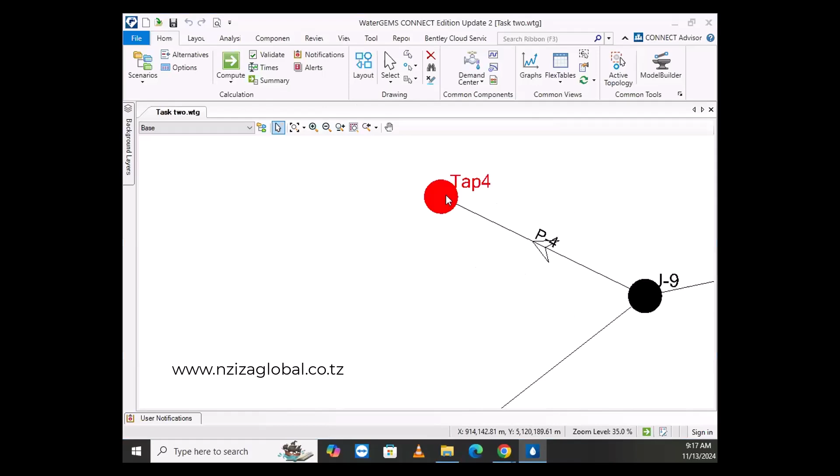So for example, what I was telling you is that on this node there was a demand. We passed here to add that demand in this corner. You can assign many demands on a node. This is the only one which should be here.

You can add others at the same node of different categories. The same node, different categories. You get this?

For example, let's imagine that at this level there is population. At this, along this way, there is a population, there is an industry, there is a hotel, there is many categories of populations.

Then you can come here, and instead of creating separate nodes for population, for industry, for hotels, you come here on this node, you just go on demand, you just put here population.

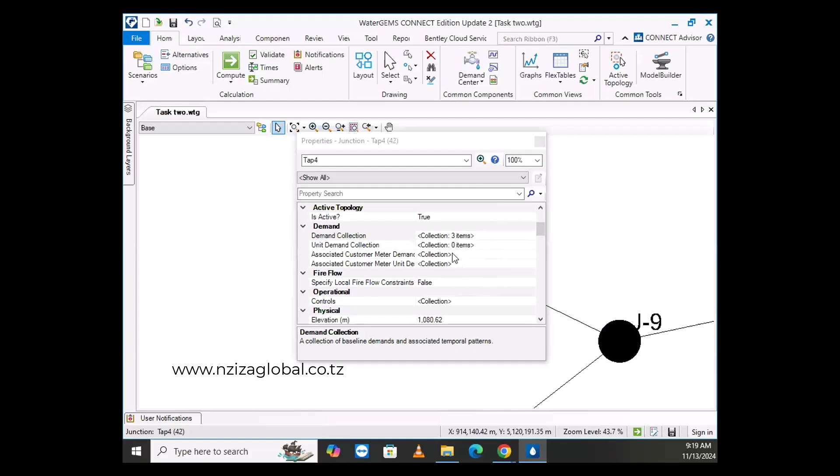So I was telling you now, if you find that this one you don't need anymore at this level, you just delete it here.

As you can even add the other one. It was easy. We are good.

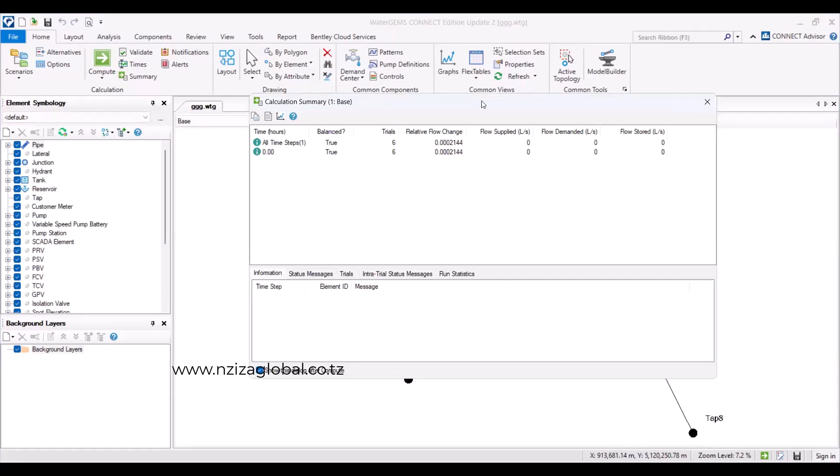Good, you are doing a great job there. Thank you. So then I want you to know, do you know how to add demand? Yes, we know, but not yet. But we can add. But the big problem for us is how to size the pump.

We didn't, you just add demand. You just add demand, okay. I will be right, or you can just wait. How I'm going to proceed, because you are still far. Okay, you can proceed during when you take a breakfast. I think we continue. You can proceed, okay. You just, when you find my mic mute, you proceed with adding demand, because I will mute many times.

You can just proceed adding demand. And then during the break I want you to finalize this one, and then I'll show you how to work with the pump. Yes, okay. It's okay, it seems that there is somewhere that there is a demand.

What about that pipe which is getting out directly from the tank? I see flow from the tank? Yes, that one. No, the other one. This one? Yes, there is a flow in that one.

Yes, there's no flow. This is pipe P3, no flow. Must be a flow there. Okay, you just add demand. And then continue following. You are doing a great job, you are doing a great job. Okay, this is good.

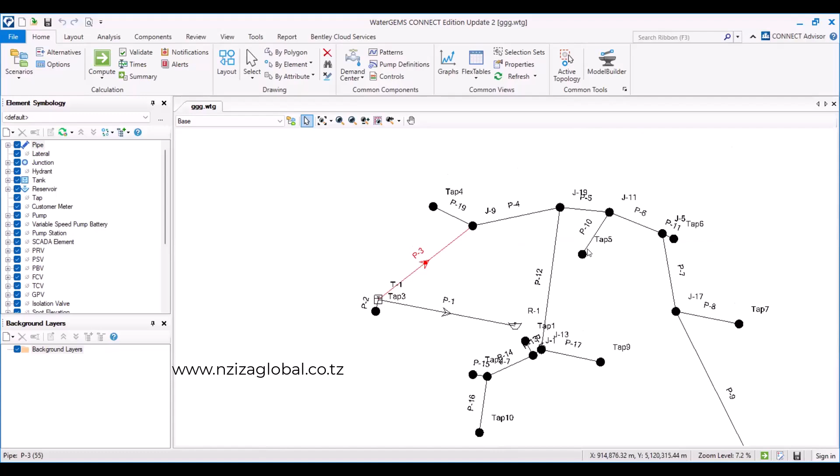So we are going to have our third day. We are going to start by seeing how to do scenarios and alternatives. We will create some scenarios and alternatives, start to compare those scenarios and alternatives, and we will see the advantages of advanced features in WaterGEMS: pressure zone management, fire flow analysis, and then we will get into that. I don't want today to go through GIS.

I just want you today, at least in this afternoon session, to have a big water supply system, to size it together, and then do optimization. Try to do optimization, try to design, to see all of that stuff today. We already had some design criteria, we already have some.

Economic consideration is that optimization you are doing, how to position your pump, how to do all of that stuff. So I want today in the evening session and tomorrow morning to have a big network that we will be working on. We all know how to put everything now.

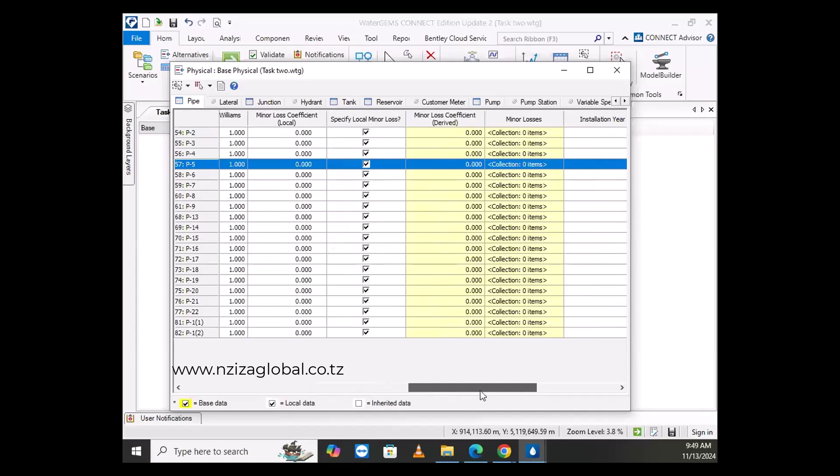But before that, let's see what is in the physical one. By double clicking on it, you will immediately see a kind of FlexTable, and most of the time it gives you all the properties that you had for your pumps, for your pipes, for physical - so you will see all our pipes here, the way we designed it.

So then, when you create a child alternative, it will give you another one - let's call it physical alternative one. By double clicking on it, you will again see the same things you already designed, but with a possibility to change some characteristics.

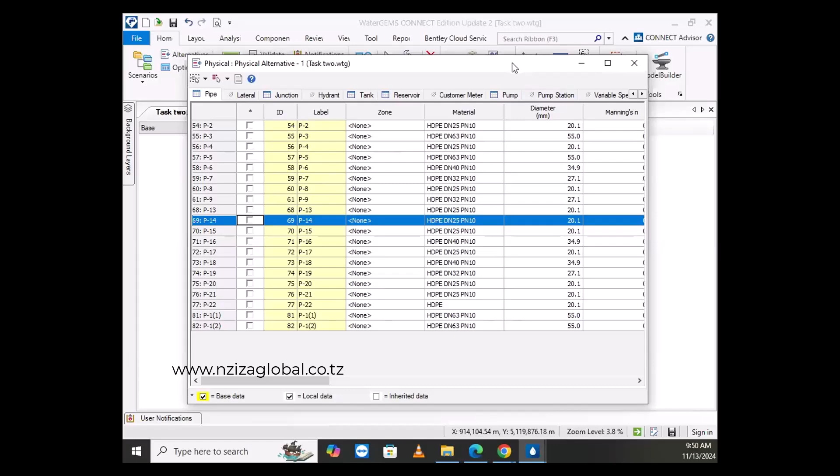For example, you may need to say, what if my transmission pipes, I make them 75? So you go to check on your transmission pipes. My transmission pipe was this one - P1, P12, this one, and this one too, I think.

So what if I make them 75? The internal diameter is which one? 65.6, yes? And this one also - I did, 65.6. And this one? The same, 65.6. So I'm saying that this one is changed.

So for this child scenario, I already changed those pipes. I cross this one. So you will see, for the base scenario, they are still the same. But for the child scenario, the child alternative...

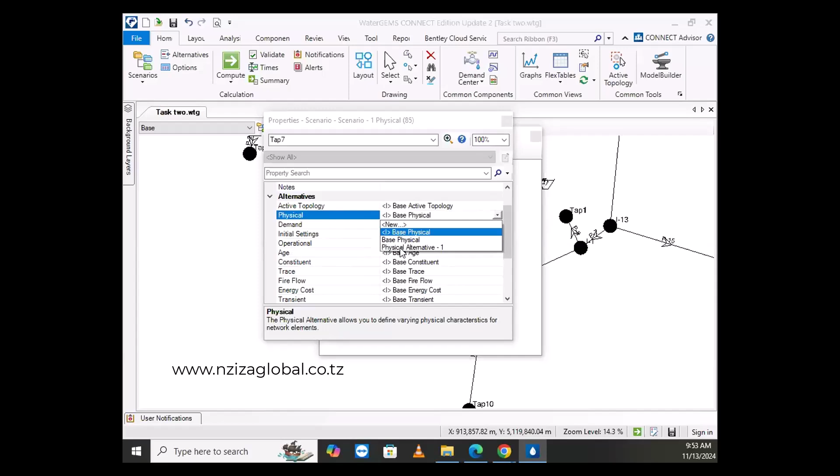All of those alternatives that we have in those icons, we may change them. So from here also we will have them, all of them here. So then we change the physical one. You go on it, you just get the physical alternative one, the one that you had. You remember that alternative. Then you click on it, so you can cross this.

Now you see these ticks can be here. When you do this, it means you are going to run this one. So then you can run the first. This is running the same as we used to run. You can check the pipe here.

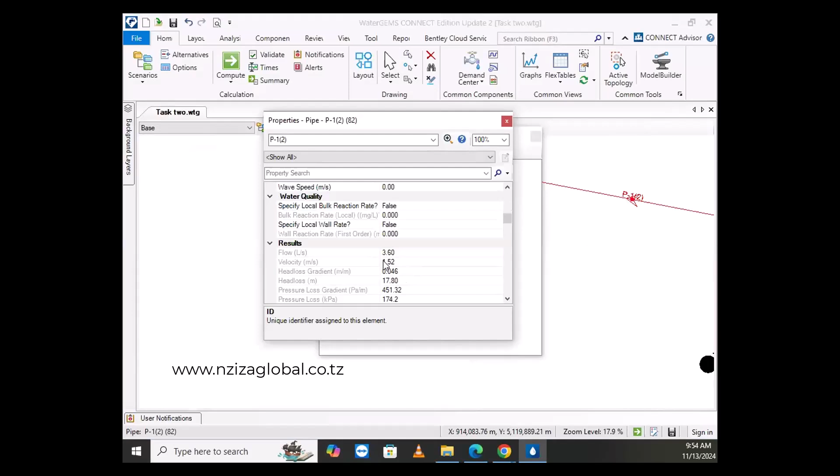The velocity is still that one, the diameter this one. The velocity is still 1.52. And then you can even pick this one and land this one. So you get the pipe have changed. The velocity as well has been changed. You get the difference. So from there you can create many scenarios, many options.

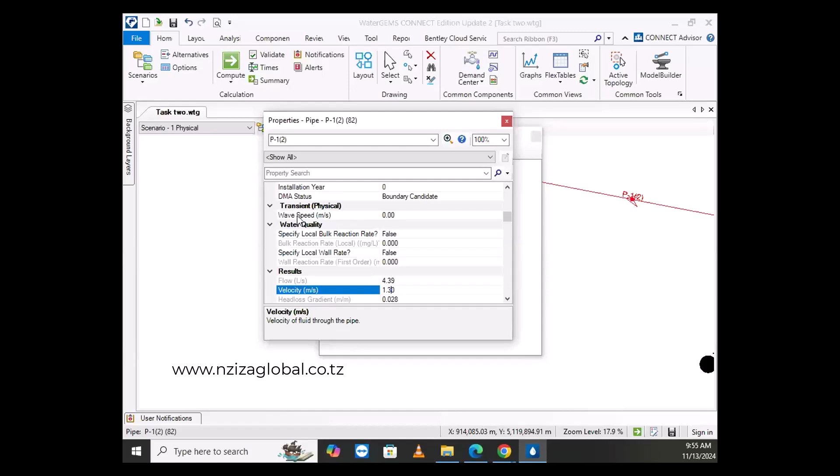What if I change this pipe to this one? What if I increase? There is also a way of adding many pipes. Add many pipes, you put them in some scenarios, in others you create them, run one by one, and see what the difference is. Is it okay?

Can you repeat how you go from base to scenario one physical? The way you reach that scenario one physical. Yeah, I know that you click there at scenario. You get this. So by clicking, let me, for example, delete this one. So by clicking on scenario, immediately I got this one. Base. This is the base one.

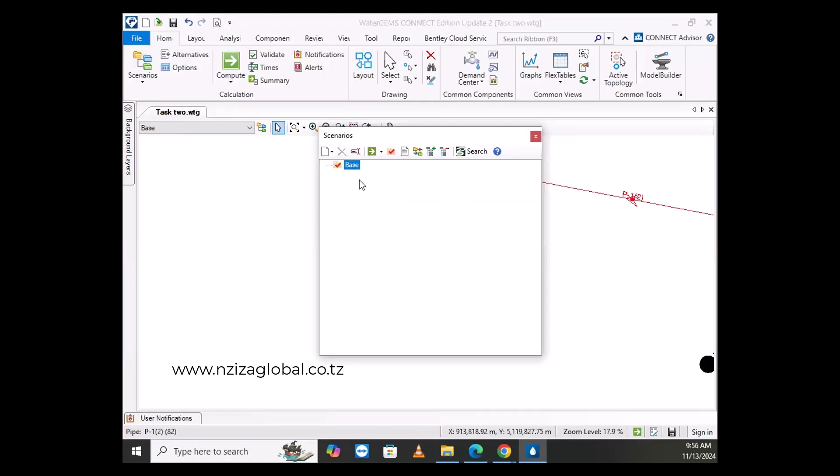So let me first explain this one. I will also turn to others. So then from here I just right click on it and create a child one. Right click on it and create a child one, the one which will be based on the first one.

Let's see now how for demand. Let's do for demand. For demand also you have to start from alternatives. So you create an alternative for demand. You know here you had one for demand. We have a base demand, the one that we were using. You create a new alternative, a child alternative.

And then after creating a child alternative, you go to change what demand you want to change. For example, in this one you will have all the junctions that you want. So you may see the demand that you have at each one. For this one you have this one, for this one there is no demand, for this one there is no demand. For this one, we remember that yesterday all demand we made it 0.17.

So now you may choose the one you want to change. For example, you may say, in my child alternative, I want this one. I know this one is the last one. I want to add, for example, a hotel there or an industry there. And in my industry we'll be having like 0.2, we need 0.2 liter per second.

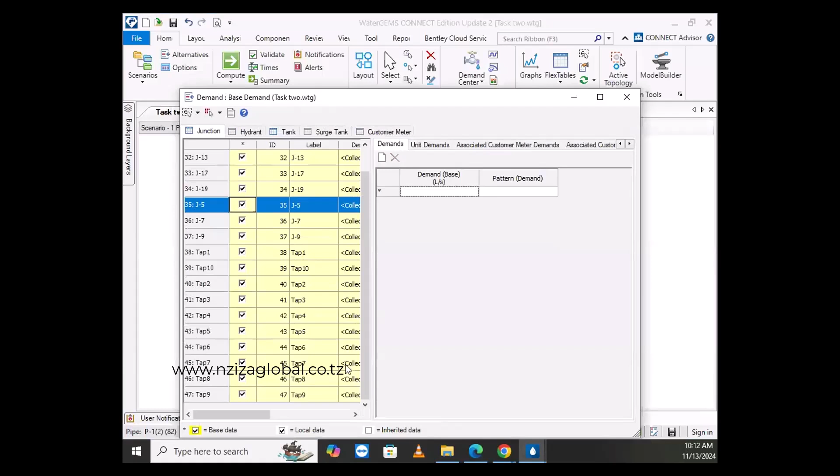Is it there? It's not there. But for my child, you're going to find it.

So then you return again to scenario. You create a child scenario again, call it demand. And then I got assign demand, assign that alternative to this one I did. And then run my model. I want to run this one.

So you see that there will be a problem. It's showing me that there is some negative pressure. So my negative pressure is where... you all know how to look where the negative pressure is. You go to junction, table of junction.

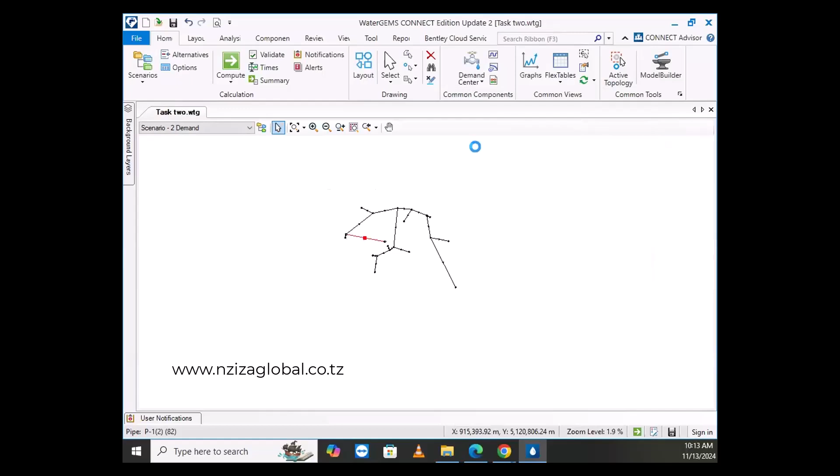Change the unit. The unit is being changed, so then I can sort it to see where there is negative pressure. I have only this negative pressure, yes? I'm asking myself, where is it? It is here, at that node.

After 5 years, when that factory will be constructed, I need to change this because the water will not reach this place. So try yourself also to add, for example, 0.5 on this node, and let me know what will happen.

You already did? You want? I come?

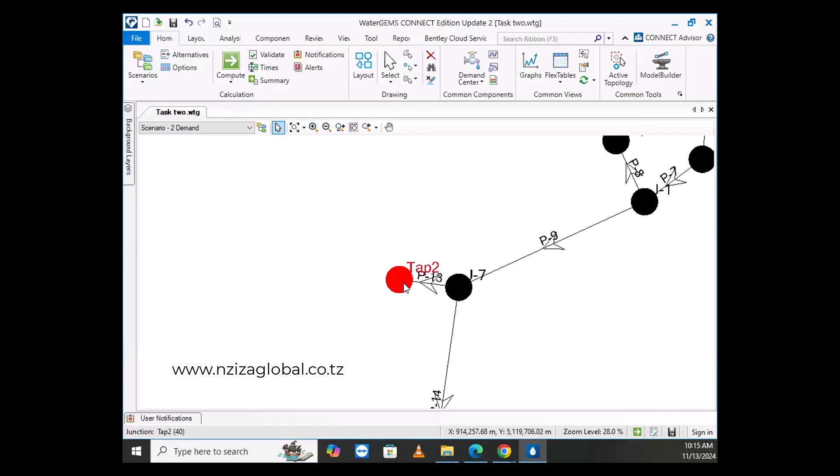People from online, are you there? Yes, yes. But we don't see your screen. I was asking you many times, you wasn't there. Yes, we replied, but you didn't hear us. So then, where are you? You already put the tank and everything?

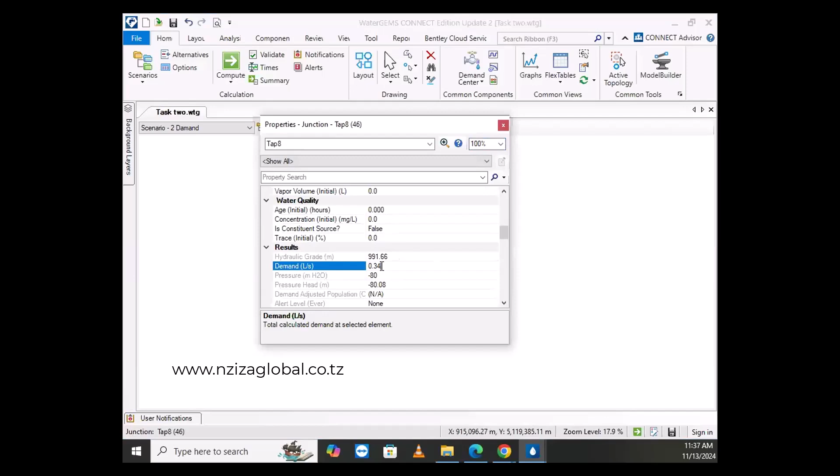The demand, has it multiplied by 2? Yes or no? Yes, yes. You see, it's calculated. All demand are being multiplied by 2.

So if you want, you can even just create a selection set to see. Just a selection set, let's create a selection set. We all know how to do it, of node.

Let's take the same one to see, take this one. Take this one also, and this one. We create a selection set. We call it what? There are some who doesn't remember how to create a selection set. We call it what? The name, please.

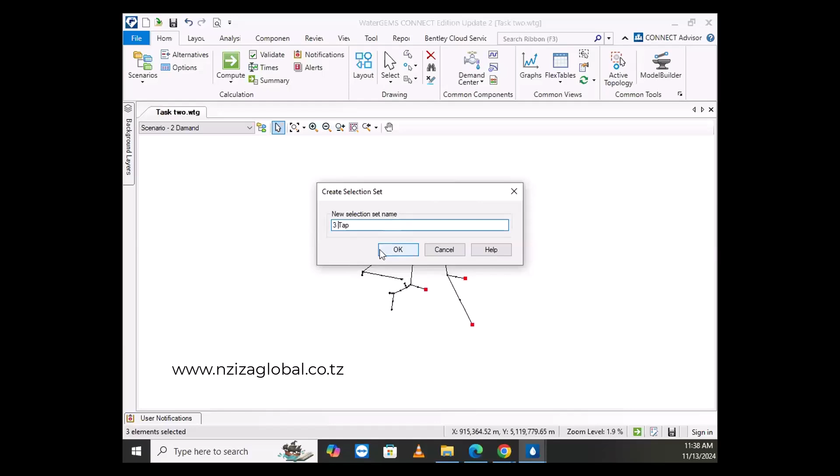Taps. Three taps, okay, three taps. We do okay? Yes. Immediately we will find that one in our selection set. You remember where to get it? Here. So it's already there, yes. You can even check on those three taps by double clicking on that.

So then I want you to go in demand adjustment and you multiply that three taps set by 2.5. You go to demand adjustment and add a factor of 2.5 to those three nodes that we created. Yes, there are some who still want to see them. They are those ones.

Then, after seeing how to add factors, we are going to see patterns. But before that, there is another thing that I want. Share your screen, we can see. Okay.

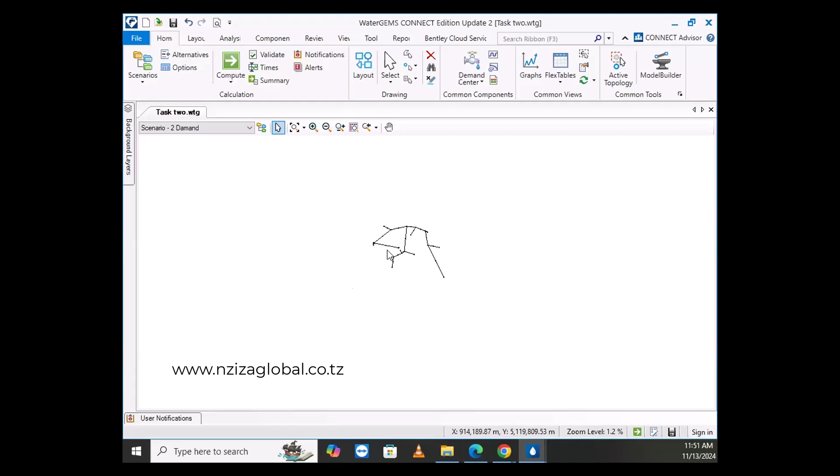We did not hear you, sir. I'm not mute. Okay, I don't know why. You are here, you are seeing my cursor. Yes, your cursor we are seeing it. So we are together. Okay, we are together. Yes, we are together.

So then you come here, there is an icon here, it's called patterns. You click on it, there will be an icon like this one. From here you can find patterns of reservoir, patterns of valves, patterns of isolation valves, hydraulic patterns. You can create one here on hydraulic, for example, and call it domestic, for example. The way we are using to create it. You may create, for example, one for industry also.

What else? Commercial, yes. What else? Administrative, yes, at least now I have many. What's the difference between administrative and institution? They are the same.

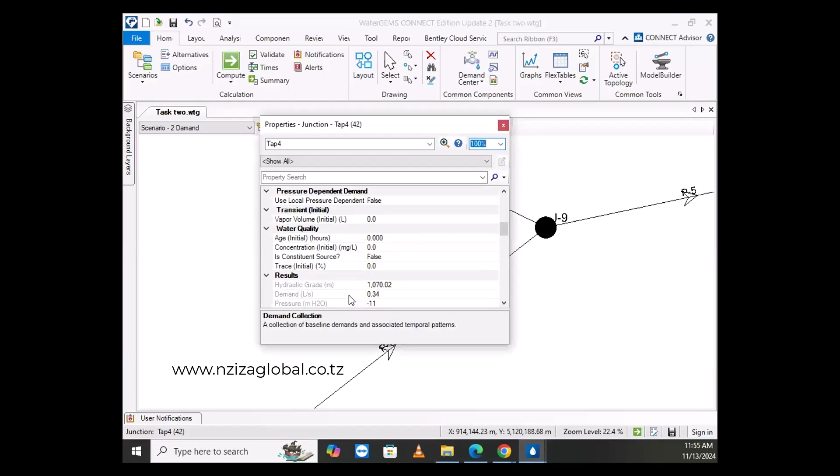Go on nodes. You do demand collection. Where is it? Here, demand collections. You just click on it. Instead of here, let it fix it, now we are going to choose. Is it commercial? Is it domestic? Is it industry? Is it what? Let's call it domestic. So when you add another one, for example like the one we are using, 0.2, you choose also, is it for industry? Continue. If at that node there are many different categories of demand, you may also add them.

So then, from here also in demand adjustment, you will find that at this level, instead of on the demand patterns, you will be finding all of those stuff that you are needed. So you may find that if the demand you are taking is for industry, you take those industry values, you multiply and you get the difference.

Yes, please? Okay, I want your model to run. This will be seen in the exercises, the work that we did will be seen in the exercises. So then, I want you to delete this one so that your model will run like this one.

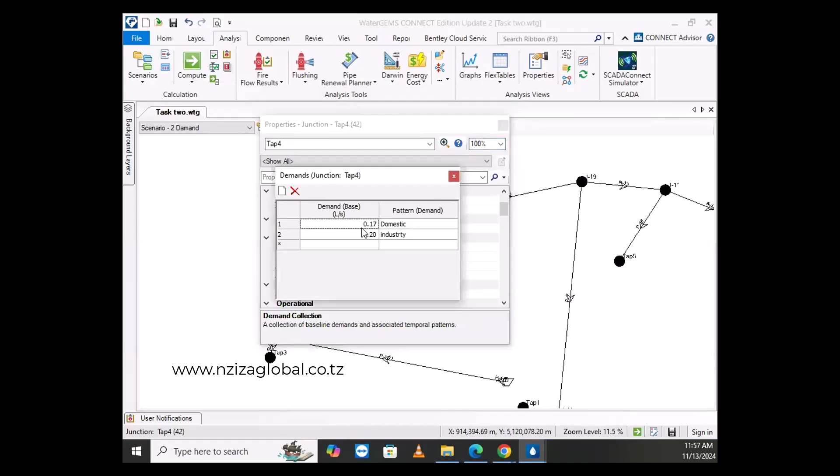Did I change somewhere else? Still here, this one. Oh, it is stuck here. Oh, I'm in scenario 2. I want the base one. Thank you.

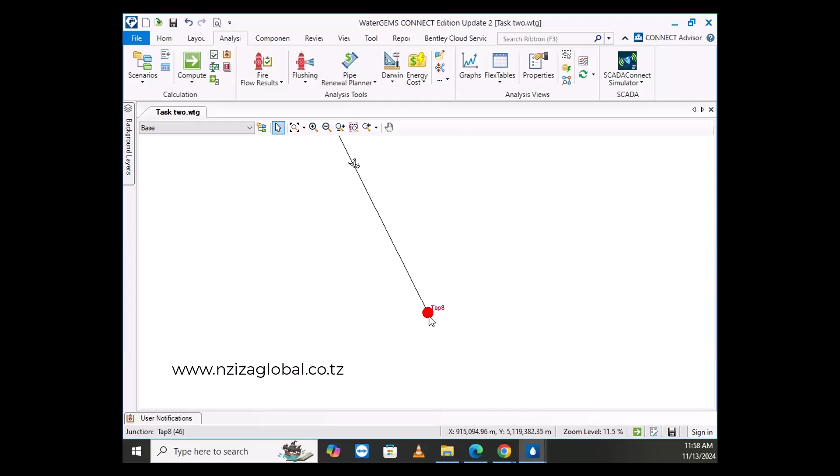Okay, then someone asked me, I'm seeing this like a plan view. So what if I want a profile, for example, for this tank to this area? Because most of you are using profiles also. So let's see how to sketch those profiles.

In view, you will find where it is written profile. Those profiles can be used even in the report. So you click on it, an icon will come like this one. You get all, every time remember you have to create one. Profile one, with this icon.

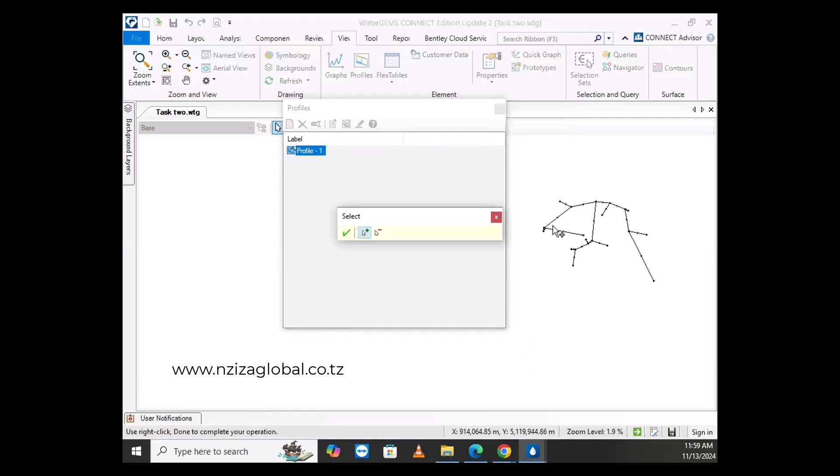You can name it, from tank to tap 8. Then you have to select that place, select from the drawing. When you are selecting, you have to select where your profile has to come from and where it has to stop. So then I select from the tank to tap 8, then I do OK.

They will show immediately all of the points that I passed through. And then here, open the profile. My profile will be like this one.

If you want that one from AutoCAD, it's difficult, but it has almost the important information that you may need, because it has elevation, it has distance, and the hydraulic grade. But it has no material, like pipe size - the material cannot be found here, but pipe size you will see. As I told you, there is many information that you will not see.

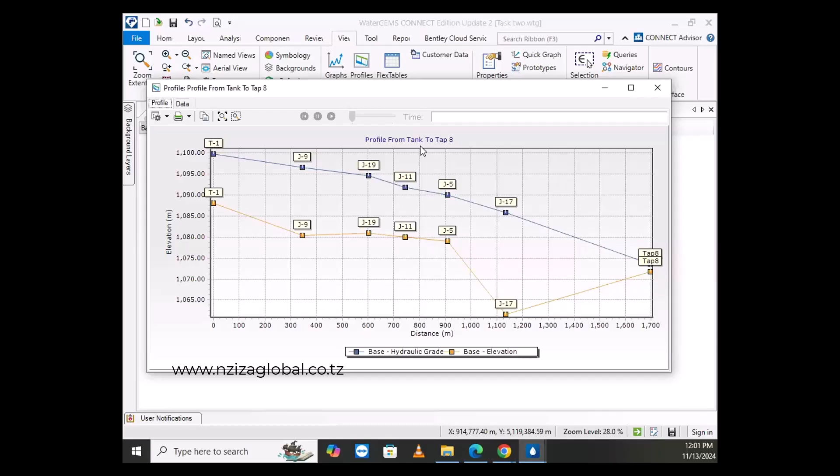You may need the slope, the flow, but you can see them in your pipes because you already have attribute tables. Let me show you what I did - it's just to show a profile of this line.

In the report after, we will also show the pipeline - a list of pipeline from here to here, velocity, everything, and then after you show also the profile of that area. Yes, it can also be done.

Let's do another profile, for example, from here to here - everyone can do it. I want to see them in your machine, from the tank here to here.

It's asking you to have... You have it? Okay, I'm coming.

But there is a negative pressure in your system. Why? You see, it immediately says if you have a negative pressure in your system, where you are passing, your profile immediately shows it.

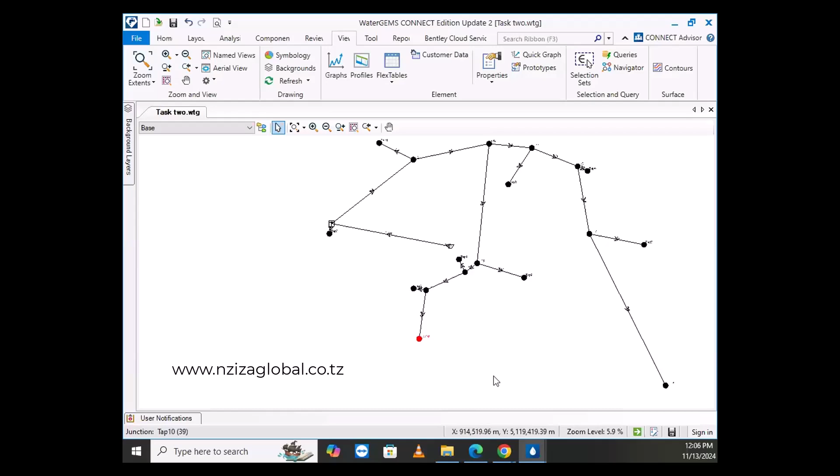It's already there. Here also, the pipe report is not something big - you just have to open the FlexTable, the FlexTable of pipe.

So then, what you have to do is think about my report - what are the important things that I want to show. If we want to include a table of pipe report in our big report, what is the important information?

Starting point and the end point, length, diameter, material, flow, velocity, the C coefficient, and pressures - starting pressure and the stopping pressure. Most of the time they are those ones.

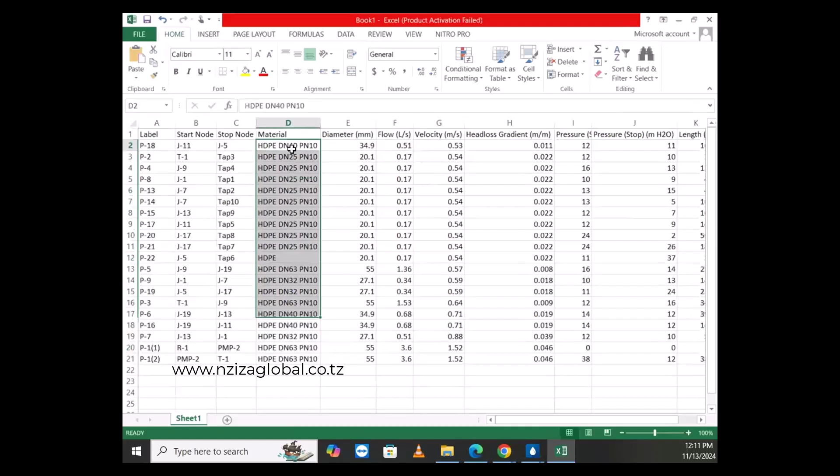Yes, and also it will help you to do the BOQ, because you will not put this in BOQ - you just do another summary for those small pipes, combine them together and produce a BOQ.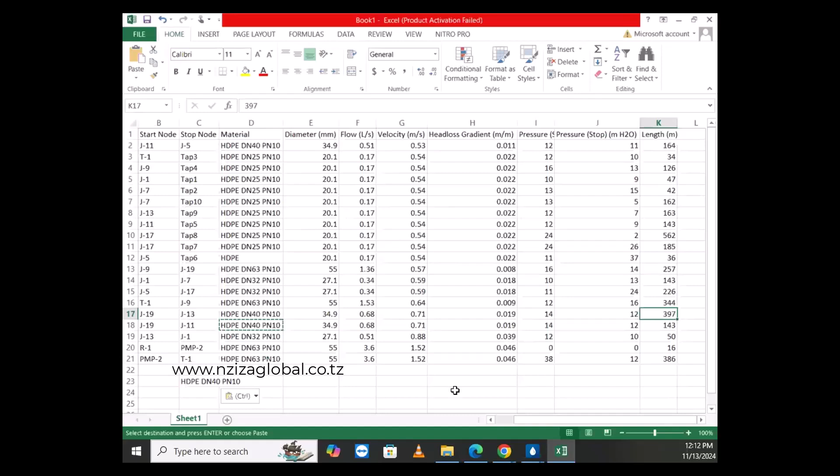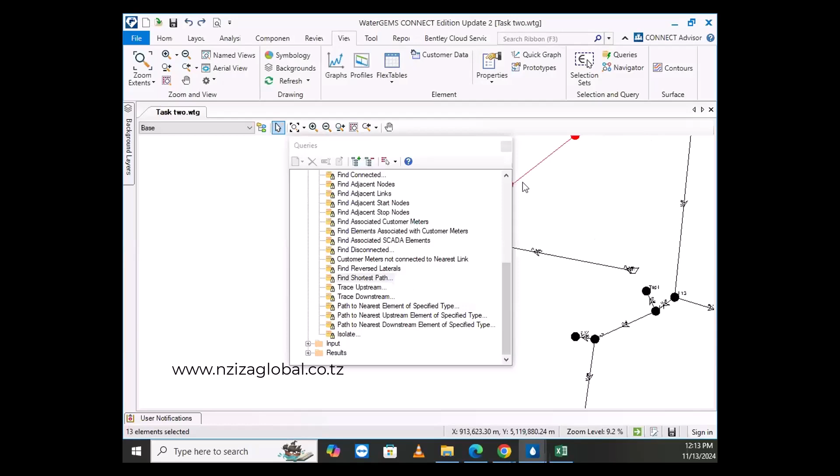So then from there also someone asked me why not see some information here. For example, when you are doing a report, you can just create select - you can select this path, and after you open, remember the way of opening what is only selected, then produce only a report of that portion.

Then you can do both - also that for the tank report, because you also have the tanks. Unfortunately, we have one here.

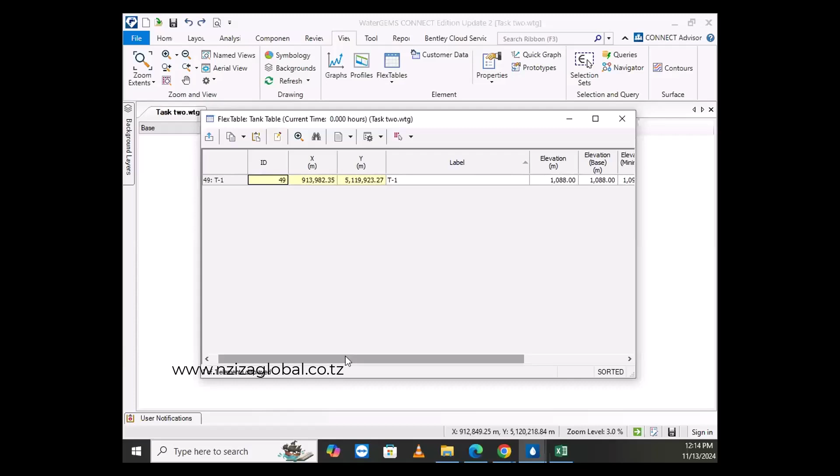Yes, you can also do a report from the tank, using the same scenario. You put the elevation if needed, the labels, the X, Y, and Z coordinates. Those are the most important properties for the tank. The same applies for the junction. This was part of the report, and most of those reports come either with a graph or with tables.

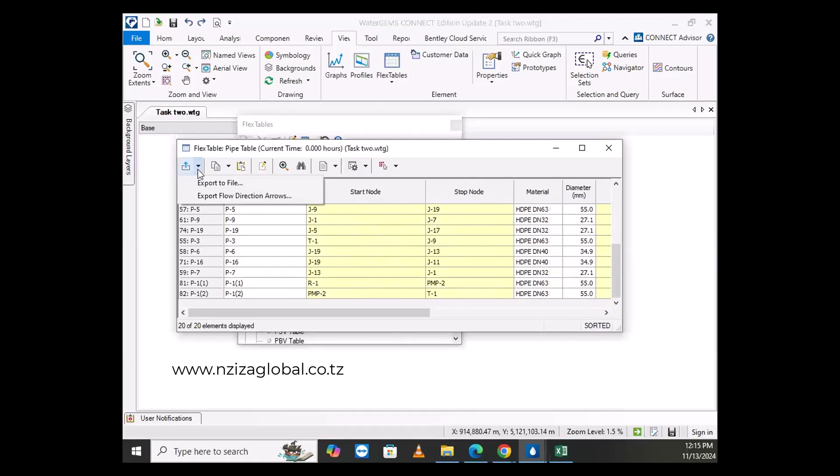So I want to show you, for example, if one of us is using GIS and we want to export the pipes as shapefiles, you just come to the attribute table again, then come here, and export files.

Here it asks if you want to export as shapefile, as text, or as CSV, which are Excel formats. So then you can choose shapefile.

In shapefile, you choose where to save the file and name it, for example day 2 or day 3. Remember, you also have to specify the shapefile type - you cannot combine pipes or lines with points. You have to create a shapefile of pipelines, a shapefile of tanks, a shapefile of reservoir, a shapefile of junctions, each one separately, not together.

Most of the time they will ask what will be in your attribute table. Those in yellow are what we have in our FlexTable. But for those using GIS, there are many criteria - some characters don't go in, and there are size limits. For example, the title can't have characters more than 10 or 8 characters long. So the model immediately gives you the names of what can go in the attribute table, and you check if it's good for you - diameter is still diameter, flow is still flow, gradient is still gradient, pressure is only P. This helps you know what to expect when reaching the attribute table.

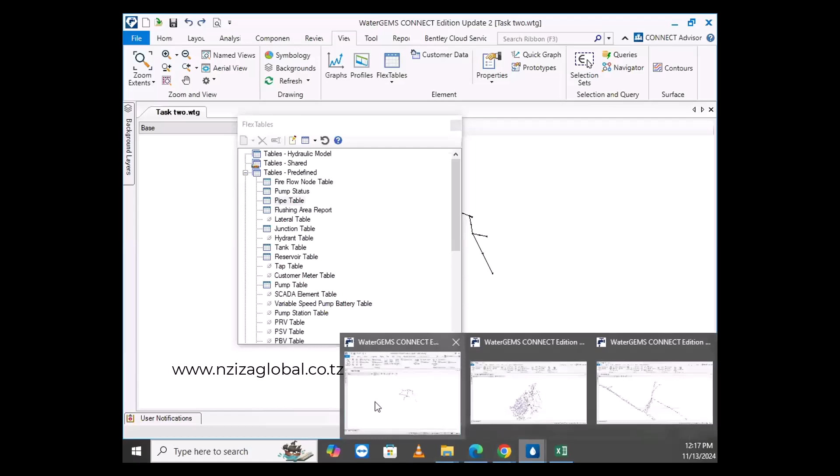So you click okay, it runs, and then you go to where you saved your shapefile. The problem is I don't remember where I saved it. Let me see... Morogoro shapefile, yes. Okay, so you see my shapefile is there. Remember that shapefiles have 4 files.

To me, the shapefile being produced here is not projected - I have to project them. By projecting them, the 4th file will be created: one projection file. We just did this for the pipes, so here we have a shapefile of pipes only. You will also create a shapefile of junctions, a shapefile of tanks, and a shapefile of reservoirs. But a shapefile for GIS must have four files, and WaterGEMS is only producing 3 - they are missing the projection file. You have to project your shapefile so that the 4th one comes.

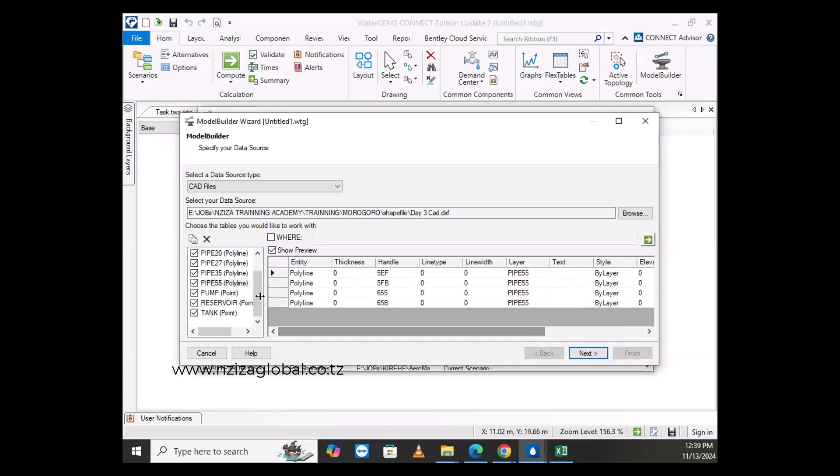The node is here, and the pipe is somehow here, not connected. So they are asking you if, within a distance of 1 meter apart, the system can connect this pipe and this node. You take that one, very good. So you can add, maybe put the tolerance to 5 meters. Start, yes, 5 meters.

But it's not good to put a length which is very high, because when it becomes very high, it starts confusing things. Because in some models, you will find pipes are almost passing here and there, and it may catch another pipe which is not connected to that.

So the others are the same. Reaching at this level, they're now asking you again the same questions. Let's start with the field one. The field one is junction. So you specify the key label. The key field is most of the time label. For our CAD, we don't have especially those X, Y, and Z, so you specify that it will be automatically taking the location that it has and put them automatically. So this was for the field here.

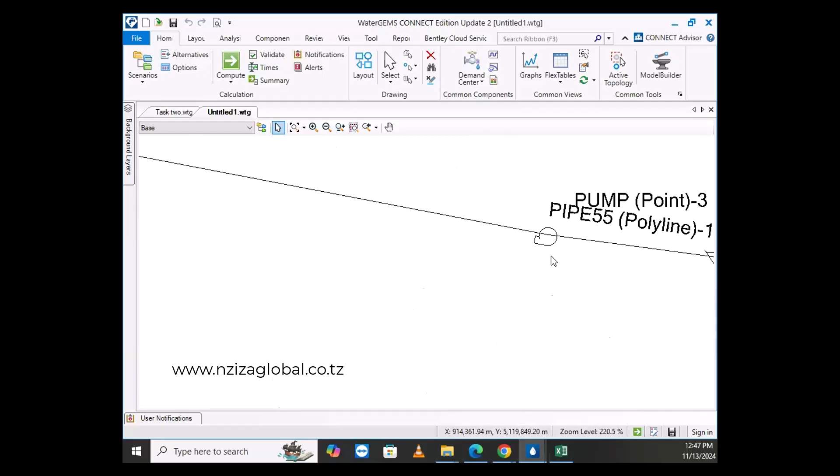You get? You see? Our reservoirs at the same location. Our tank at the same location. Our pump at the same location. Everything at the same location. Yes?

I may ask yourself what will be remaining. Are we all here? Good.

So I see you added the... have you added the pump? Not yet. Yes, the pump was a problem, not yet for you, me, didn't yet.

I did, can you run it? Yes, yesterday.

Okay, your network is running. The demand, I see you put it well.

So I want you to see how to put the tank, the tank, the pump.

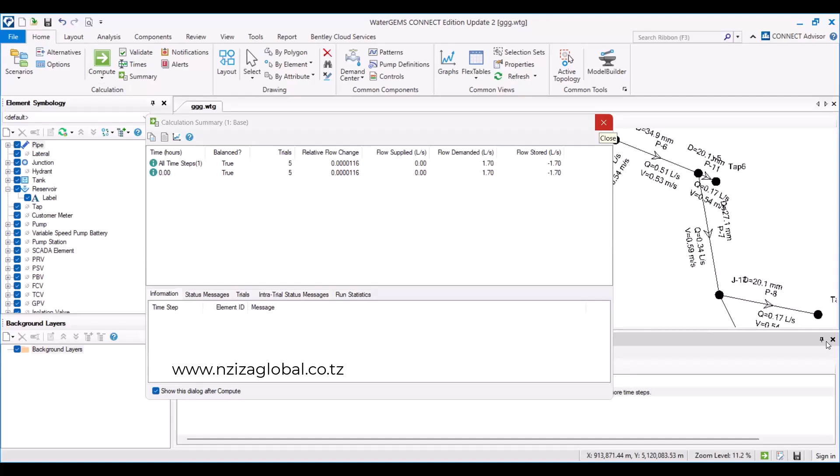How? So stop sharing, I'm going to show you. We proceed after me, can I stop my sharing? Yes, okay.

Share your screen, sir. It's already shared. But I can see.

Okay, get now, I see. Now yes, you are seeing. I see it, so let me delete this one, yes, to be at your...

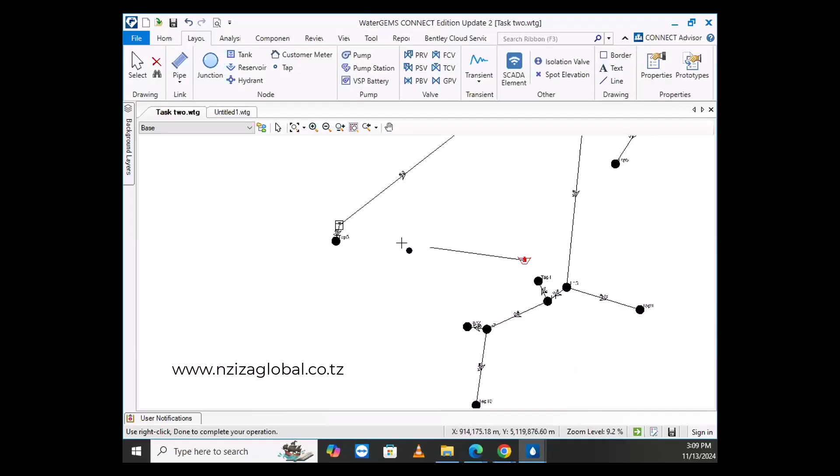Okay, I delete this, so then I add that pipe. Okay, mm-hmm, so I think your network is here now.

I validate, okay, to see, sir. I validate also.

Okay, then we are going to add the pump. So you remember yesterday we calculated the characteristic of the pump, yes? Here's the characteristic on the pump, yes. So but how to use that sheet?

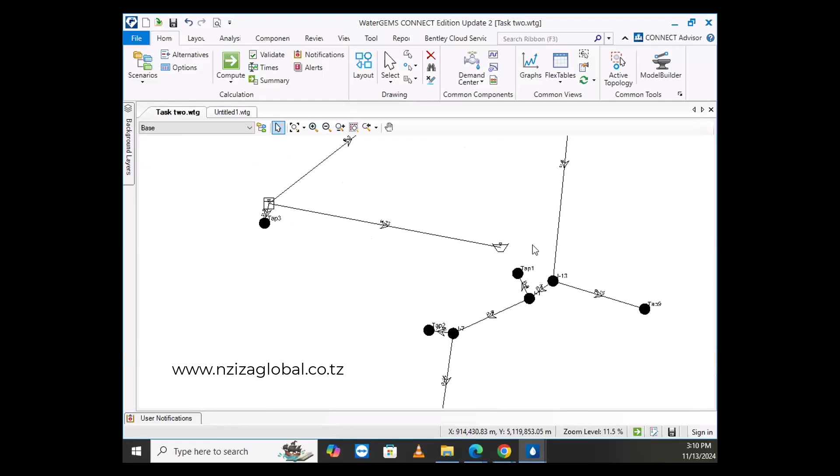Sorry? I remember we calculated the characteristic of the pump, but how to use that sheet, spreadsheet, I don't get it. You can continue, you can continue.

Okay, then we're going to put the pump. The pump, you take the pump, okay, yes? And then it's recommended to put just right the reservoir where you want to suck water.

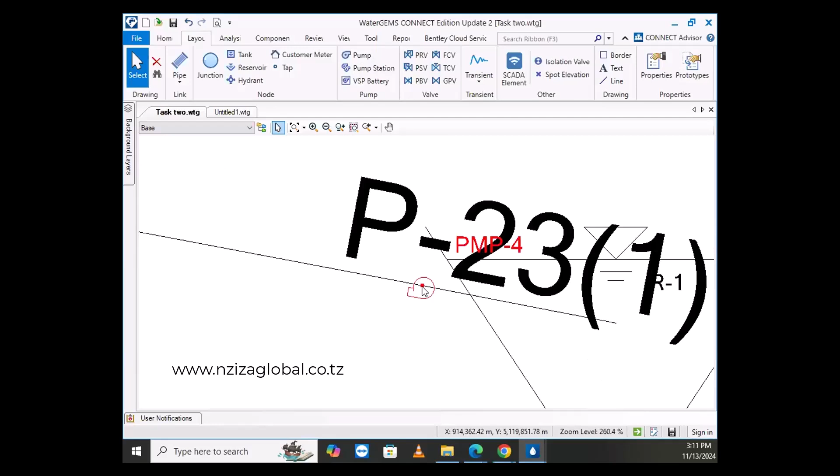So then I put my pump. They're asking me if I want to split this into, no, put on reservoir. They ask me if I want to split the pipe into two. Yes, I do, yes. So then my pump is there. Yes.

So then after putting my pump, I have to define it. Yes. Okay, I go to the property of it.

Then I get where there is pump definition. Pump definition is here. Yes, okay.

I go on it because you see there is no pump definition in it, and sometimes they will ask me if I want to define the pump. Yes, they are telling you edit pump definition only. Yes.

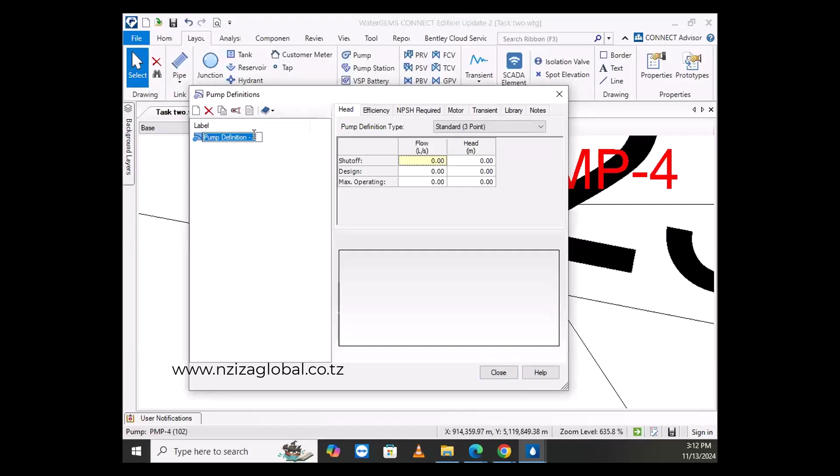You click there. It will be this icon. Okay, yes, you are here. Then you create a new pump definition. Let's call it pump one.

Then we have to set the types of pump definition you want. We are designing a design point. I take this one, so it will help us just to use Q and head.

Okay, then yesterday we calculated the pump using our knowledge of engineering. We get that the pump we are going to use has a Q of 3.4 liters per second, and the head was 40.

If you feel like I can help you again in pump calculations maybe later. But okay, let's have this one. You will immediately have a pump curve.

Yes, you can set your efficiency and allow the pump to work on best efficiency point. Efficiency is better to make it at least 75, the minimum allowable.

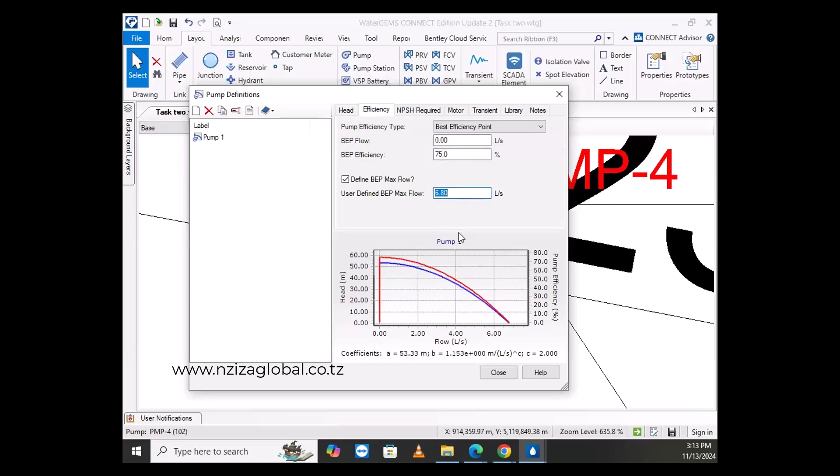Okay, then at this stage you can cross this. After that you go to the property of the pump, then you go to pump definition.

You give that pump a definition of pump 1. That means if you have many pumps, you can create many definitions, and each pump you give its own definition.

Okay, then you cross and you validate your network. If there is no problem, you run.

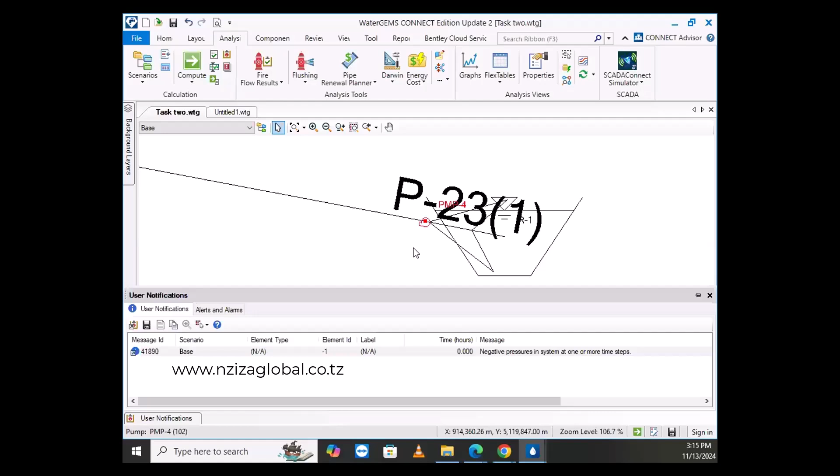Are you there? Yes. It's run. Let me do, I was listening to you. Is it now running? Let me see. Hello, hello, I have shared my screen.

Yes, I'm seeing your screen. Yes, and I have a challenge. My water flows from the tank to the reservoir. I have a problem with this.

Hey, you do your assignment. Do your assignment, yes, please.

I'm getting you, you have an issue here. Yes, I have a problem, see my layout. Yes. Yes, I have a problem.

The water flows vice versa. Your pump is pumping from tank to the reservoir, while it should pump from reservoir to the tank.

So that means you have to reverse it. You double click on it. The tank? No, the pump. Right click on the pump.

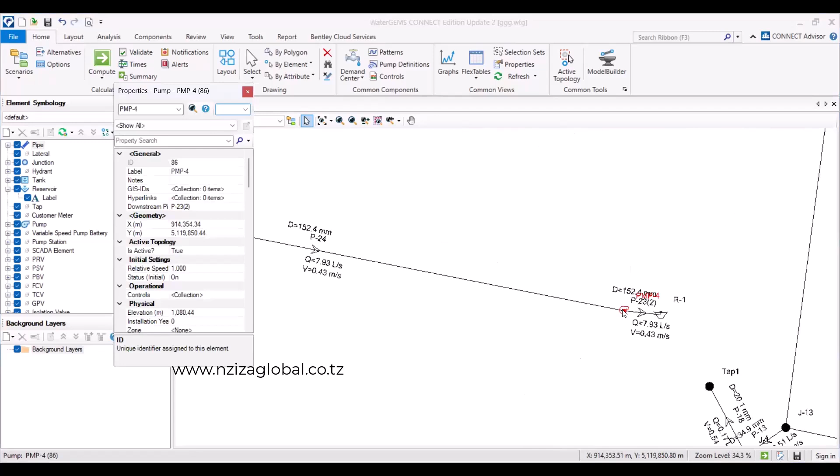Right click. Okay, right click, yeah. Then reverse, reverse. Let's see. Okay, let's see, I've already clicked. And then run it again.

Now it's okay. Want me to repeat again? It's okay now. Is it now okay, right? Yes, it's okay. That's good, then yes.

What else do you want to have? Because you already put the pump. Do you follow when we were putting the factors?

To put the factors, I want you to repeat it, the place where you do adjustment of demand. I don't get you, where, if I wanted to do adjustment of demand? Demand adjustment, yes, demand adjustment.

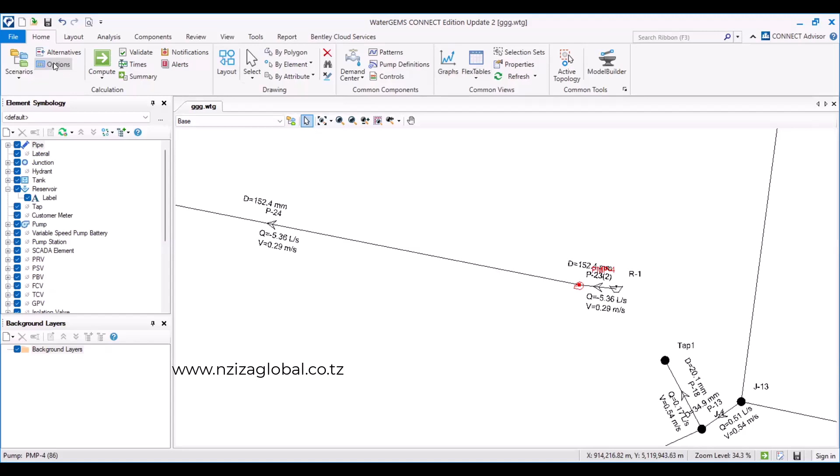Then go on option. Where is it, option, is this one? Yes, base demand calculation. Let me share my screen to proceed. Okay, quickly, okay.

So, demand adjustment, you come on option, yes. Share my screen, sir, base calculation. You go, sorry, you can start. Then you go to...

You have to activate demand adjustment first. And then after activating it, you come here, active demand adjustment, then click on this one.

And then here there is a scope. The scope is one of the selections that you already chose. You remember, by creation of the model, there is one selection set which was created. So we created another one for free taps, and the last one we created Monday, this one for service line. Do you remember them?

And here you can choose the entire set. Here it will require you to check on the patterns, if it's commercial, if it's domestic, if it is industry, and then you specify if you want to multiply, add, or subtract, and then you add the value. Let's for example multiply by 2, our whole demand, our entire demand. Let's multiply it by 2. You do. Okay, yes.

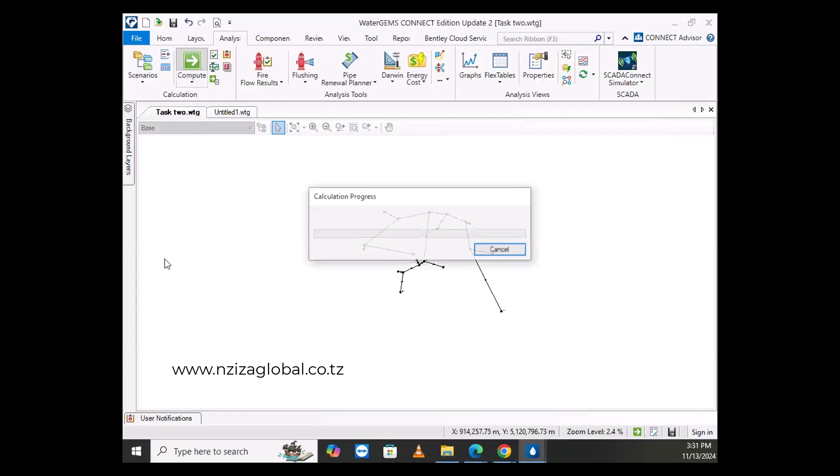Why the base demand was 0.17? Yes. Multiply it by 2, it becomes 0.33. Okay, so you get it? Yes, I get it. Okay, you get it please? Yes, I get it. Okay.

I have already seen, so it's okay sir. It's okay? So then it's okay. You get another issue?

My issue is, the first issue, to calculate this is the characteristic of the pump. I didn't get you yesterday. Can you repeat for me just a few minutes how to calculate the head? To calculate the head of the pump. How did I calculate the head of the pump? Yes, like you did yesterday.

Do you have the Excel? Do you have the Excel I shared on WhatsApp yesterday? You didn't send it to me. I shared it on the WhatsApp group. Let me see, okay I will check it. Have you got it? Let me open the phone. So your Excel looks like this?

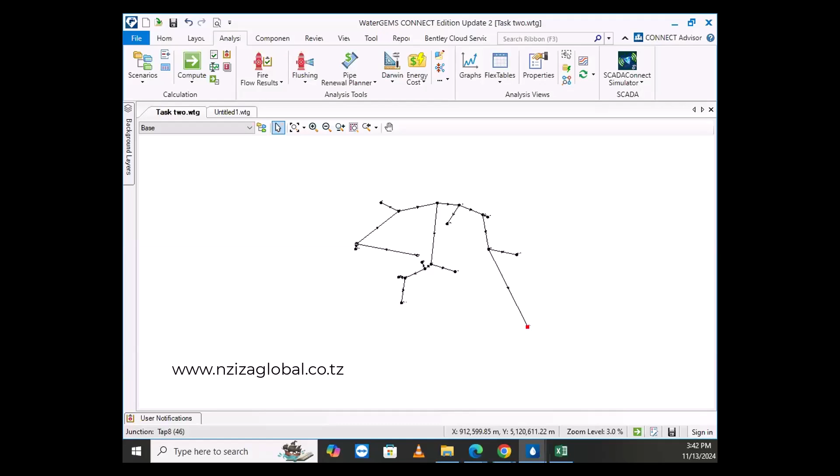You just look at the demand which we supply to our system. It was 1.7. Then we check what are the hours I'm going to pump. Okay, so our network has a demand of 1.7, you can see it right here. The flow demanded is 1.7, and this flow is for 24 hours. Because we want our pump to work 12 hours, we have to multiply it by 2, and we get 3.4. So our Q will be 3.4.

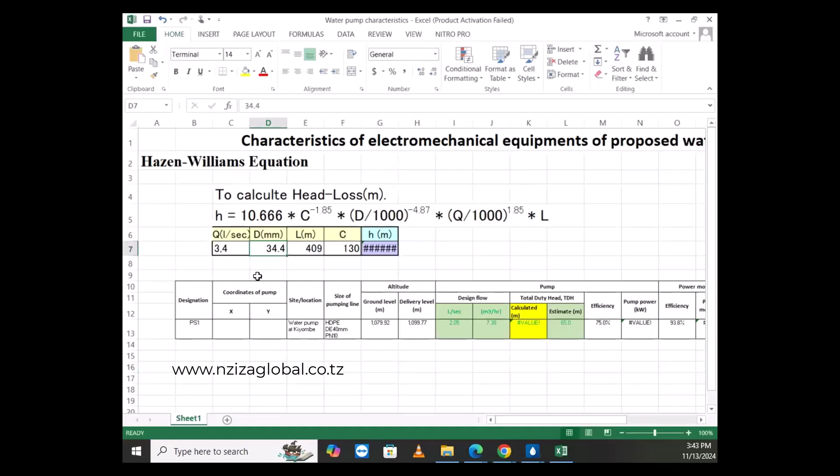Sawa. 3.4. Okay, so the pipe that we are going to use is the 40 pipe. It has an internal diameter of 34.4. You still remember? Yes.

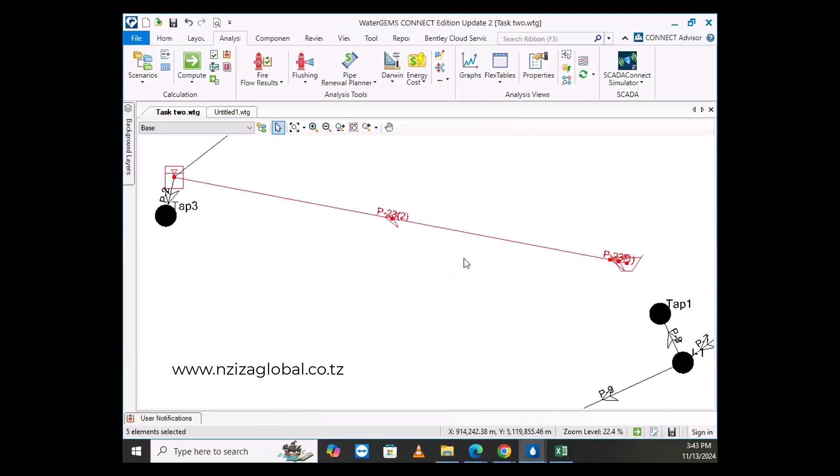So then we have to find the length of our transmission line, which is from here to here. So in order to get those pipes, let's remember how to trace the shortest path from the reservoir to the tank. This is my transmission line, I open only those pipes, then I get the length. I can get it on the statistics. I get 409.

So to mean the length of my transmission line is 409, I put it here, the length. 409. Then I'm using an HDPE pipe which has a C coefficient of 130, you remember? Yes, I remember. Then I get my head loss, this is the head loss.

So then I have to get the ground level where water is coming from, and the delivery level where water is going to. My ground level is this, the level of my reservoir. I copy this, it's 1078.79. Okay, 79, I go there, 1078.79.

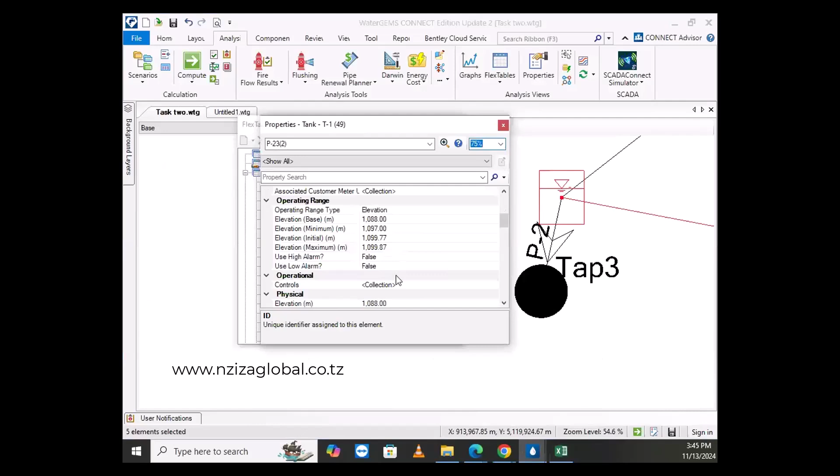I also go to the delivery point, which is this one. This is 1088, I put it here. 1088. And immediately I have to put my flow also here, design flow, which is 3.4.

And immediately my calculated head will be this one, and you are seeing that I'm getting 31. As we cannot get a pump for 31, we just adjust it to 40 by putting also a safety factor. The estimated one will be 40. Okay, that's where those characteristics come from.

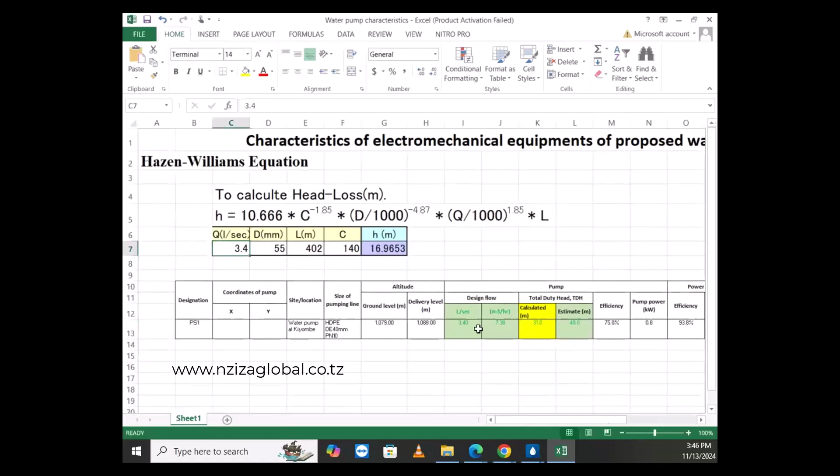We have our Q, then we got the head of our tank. Thank you, I understand. You understand? Yes, but I have another question.

Can I share my screen? The setting with the tank. Yes, you can share your screen. Let me share my screen and ask you some questions.

What, you are tired? So guys, I want you to be on top, there is another thing that I want to show you. Time is running, don't go home. It's running, but this is very tough for you. No, very tough.

Have you shared your screen please? I already shared it. Show me my question. Yes, I'll see it.

Okay, my question is on the tank setting, let me click here, my question is here. I know this is the elevation where it comes from, but the minimum elevation, where did you get it and how? Me, I don't know, I just picked a number and put it there, but I want to know. Have you caught me, my question, eh? Yes, I caught you, okay.

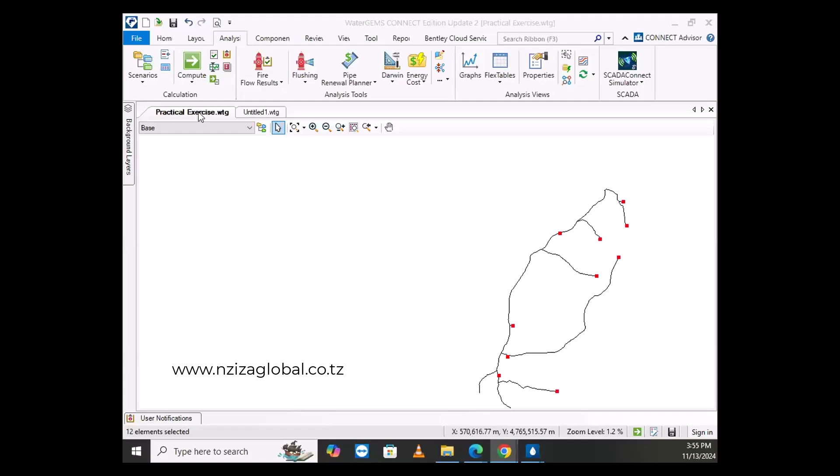Hello, let's see here, it is below. Yes, you have to, that's it. So, the network is this one here, right?

So then, I just want you to put 0.9 on each end node, the demand, at each end node. So then, there are some ways going, click on this one, 0.9. And going this way also, click on the other one. Yes, but this is stressful.

Yes, there is a way of getting all together, you just come on trace. Trace, yes, we saw that tool. So in trace, there is not only trace, you can find also how to find some nodes. You may need like orphan nodes.

Yes, those are nodes that are not attached anyway. Most of the time you start running your model and it's telling you this node is not attached to the network, when validating. So there is a way to find it. You just double click on this one, and in your network it will tell you if there is some. For example, let me just have this one there.

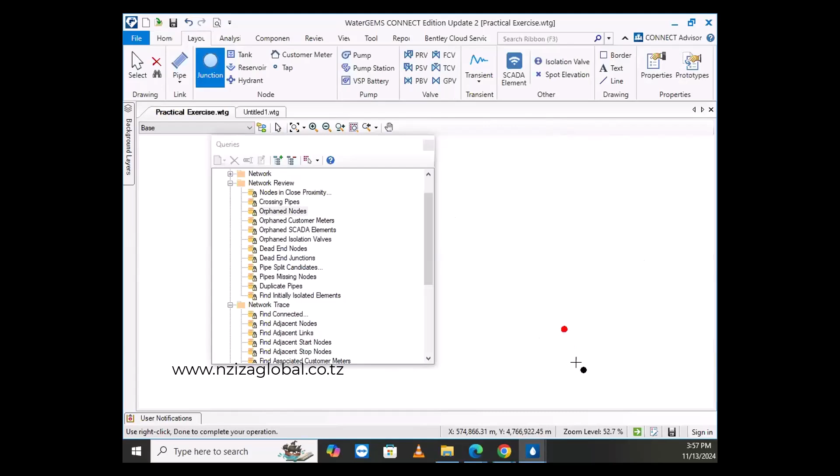This one there, this one there. You see, I put those nodes like this, and it's very difficult for me to find them when I'm working. But by clicking here, you see, they immediately come up. Yes, maybe you were sketching.

Unfortunately... fortunately you are all good in drawing. Maybe you start drawing and then you jump, instead of continuing here you continue there, and you may not know it happened. By validating, they will tell you there is a problem, node is not connected, and you will start asking yourself, where is that node? In a network like this one, it's too many.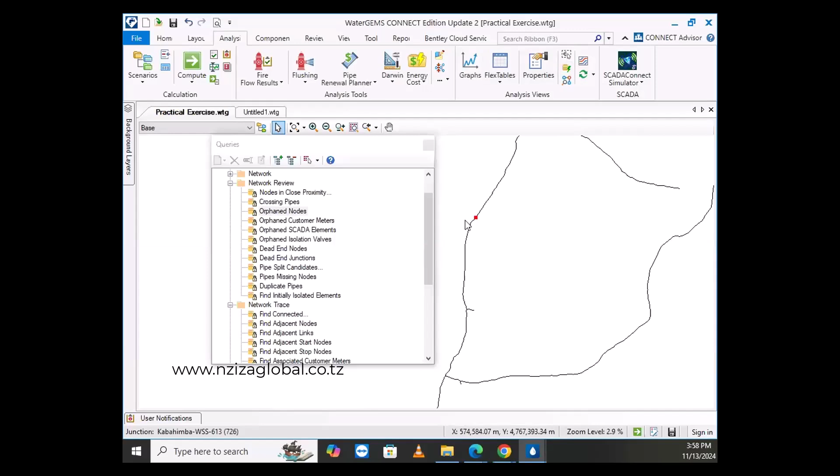Yes? You go there and press, you do orphan node. They will immediately tell you that node which is not attached to the network. So those are tools that you have to continue exploring. Okay?

They do not... dead end junctions. So then from there you can just select, you can do a selection set. Then do a selection set, maybe you call it dead end junctions.

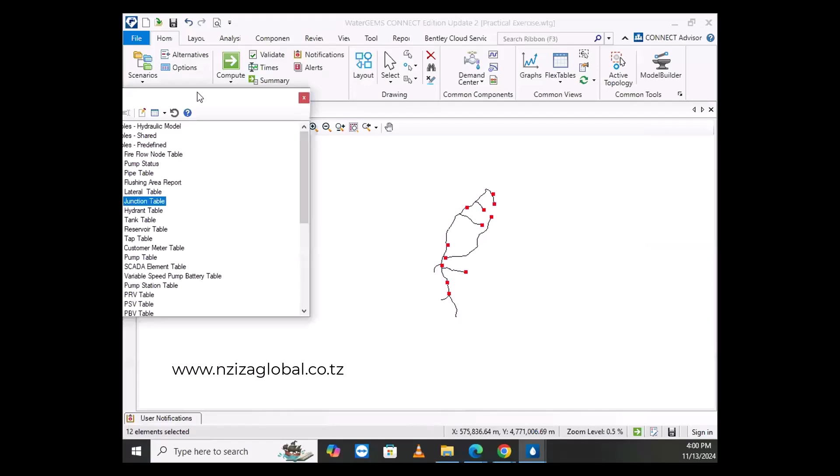Start putting them if you want. I will show you later. Can you do that?

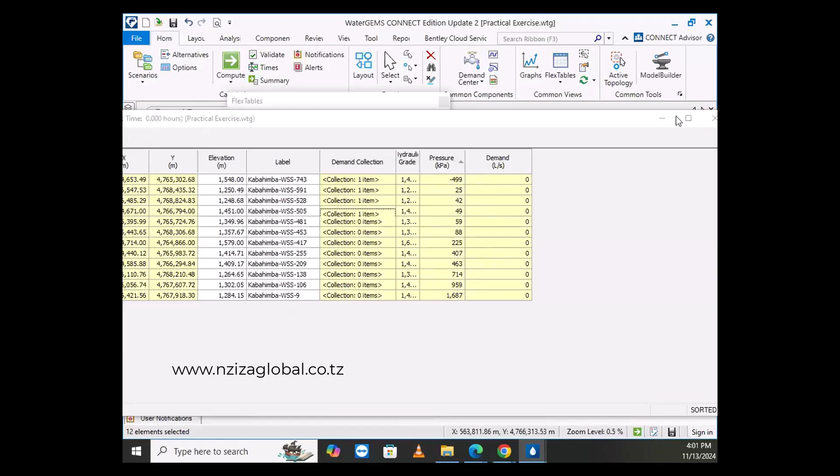Or group edit? No, group edit not working on yellow things. And there is a way of doing that. There is another demand control center, yes, you open here.

It's okay. And from here you can choose... wait, okay, this one. Wait, yeah, I'm just finding this one.

So let me delete this all. Yes, come just here from this one and initiate my demand. All my demand will come here, yes, all my nodes will come here, and then I can choose from them the dead ones. You see they are coming, okay.

And from here I can just global edit. But this is when all are the same. It will be difficult for you to get many nodes of the same demand. Is it possible? Yes, each demand will be different from this one. This village will be different from that village, will be different. This water point different from this water point. Wherever the case, you will need to type the demand.

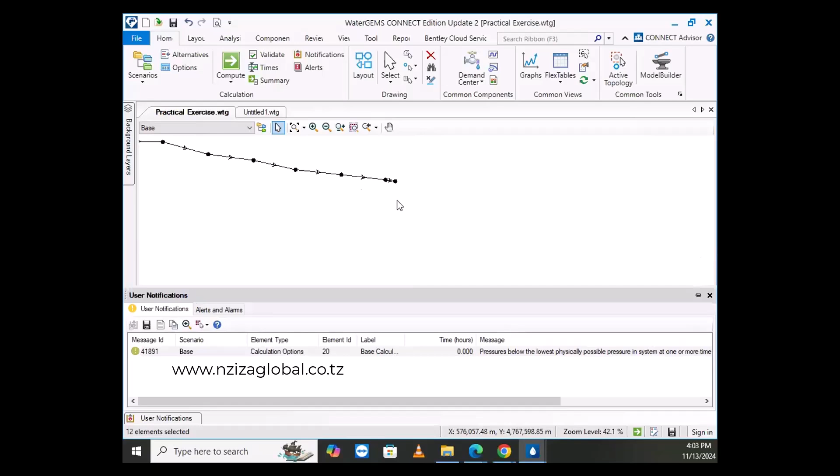You get also that. So then, after putting that way, there is a valve that I want to show you, which is called a flow control valve. A flow control valve will help you to do this way. Maybe you are seeing one tank is giving water to another tank. For example, there is a tank here, and just down here, even you are seeing this tank is giving water this way, it is giving water this way. You know why? Because most of the water is going down to a certain other tank in big quantities.

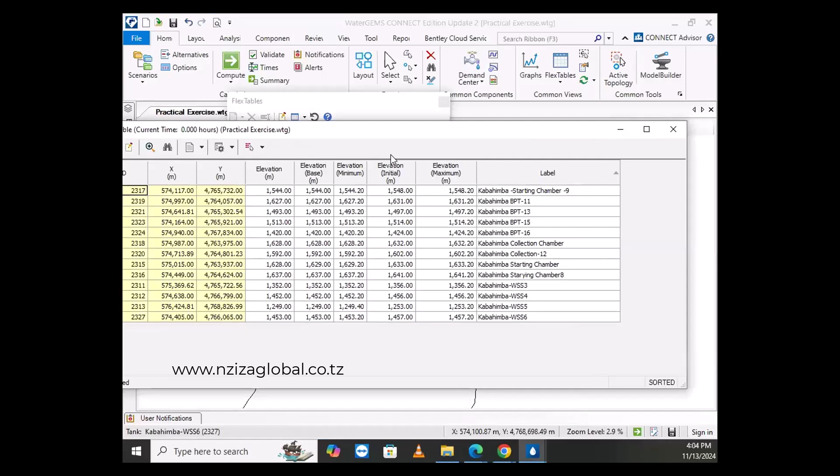Where is it? You can change the size of the tank. Can do it like this. So one is here, yes, another one is here, yes, another one is here. To mean, most of the water is running down here, yes, and they are going without any control. We are together. So what you have to do is put a flow control valve on this tank.

I just want you to follow on this. You have to put a flow control valve on this tank. How to do that? You first see the downstream of that tank, how much water it needs. So for example here, there is a tank here. Water is going in this way, water is going in this way, but here also some water is coming, yes. So then, by sizing, I have to know how much the quantity which is coming from this, which is going this way. We have 0.05.

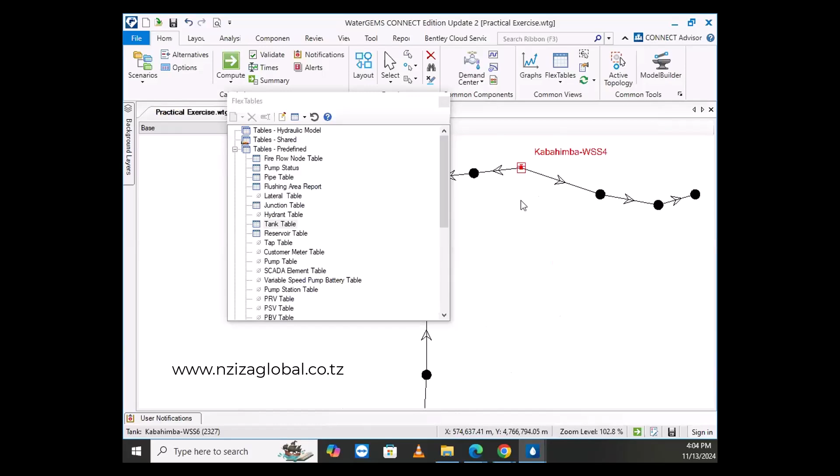This is at a precision of 3 at least. We have 0.9, yes, going this way, and another 0.9 going this way, yes. Together it's 1.8, going in these directions. What I have to do now is to set the water here. How is it?

You see here we are having 63. Negative is because of the direction, remember the direction, yes, you can reverse it. The flow cannot be negative. So here there is going 63. So I have to set that it goes 1.8, so I have to set a flow control valve then.

So flow control valve is this one, this one, FCV, yes FCV. So I take it, I put it just near the tank. It goes to the direction of the pipes. Now it is going like this one. Why should it be going like this one? I will have to reverse it, yes, it goes this way.

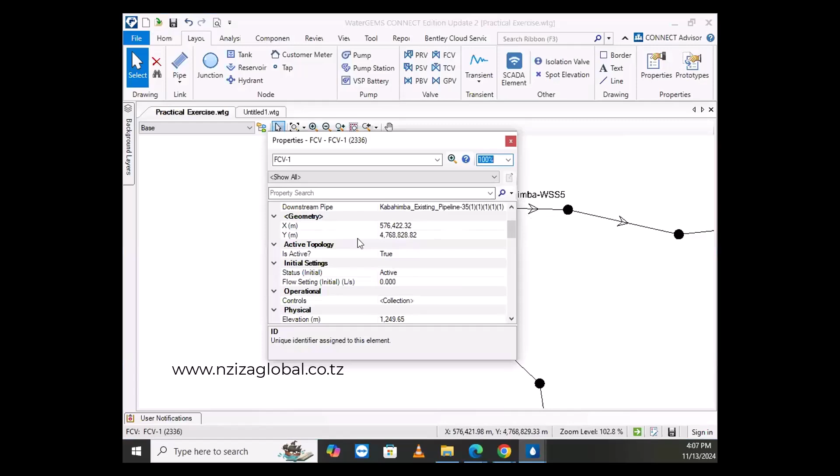And then I have to set the flow, which I have to pass through that flow control valve. Are we good? It's here, flow setting. I set 1.8. We are together. I do okay. Before running I have to validate first. It's okay, and then run.

So in these pipes, you will see that now the flow is 1.8, which is needed down here. In this pipe 0.9, in this pipe 0.9, and then we have 1.8 at the inlet. So then you get it.

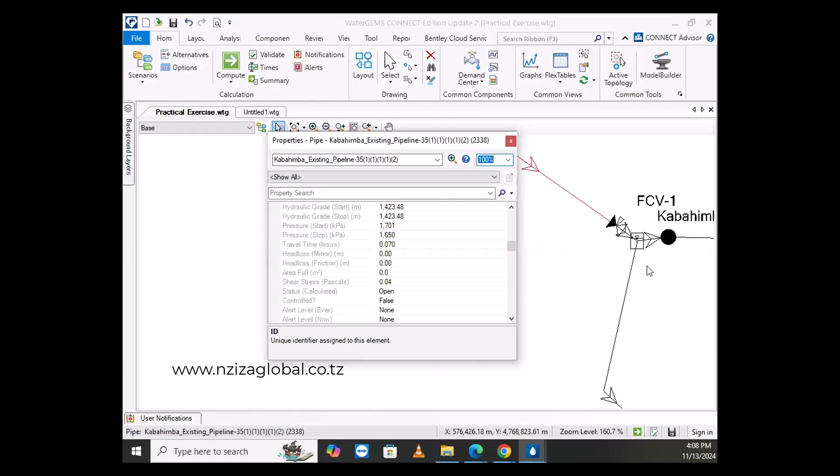So then we go to the next tank. You start from downstream, going up to the last one. But I said each tank must have a flow control valve. It's a must. Each tank must have a flow control valve.

In design, use that one. In the model it's even taken like a gate valve, because it will help you size the pipes, which is exactly accommodate the flow that you are giving. Don't think you won't see it, there is even, it's like a valve.

So then we go up. Guys, I'm doing like two tanks, others will continue doing it, because the demand there is somehow much.

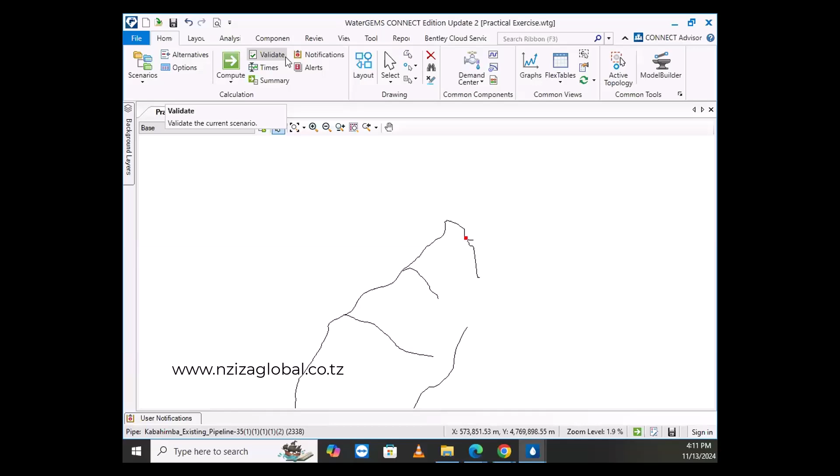When people are consuming water, the tank is getting emptied. When people are not consuming, the tank is getting filled like this. So you balance all of those situations. But now, as we are still looking at this simulation, we are taking tanks like water passing from there - the water entering is the same as the water going out.

After, we already set this. We come up, let me do a selection set of the tank. So the next one is this one. This one is easy because you have one pipe going down and the other pipe coming in - we check the pipe which is interlinked.

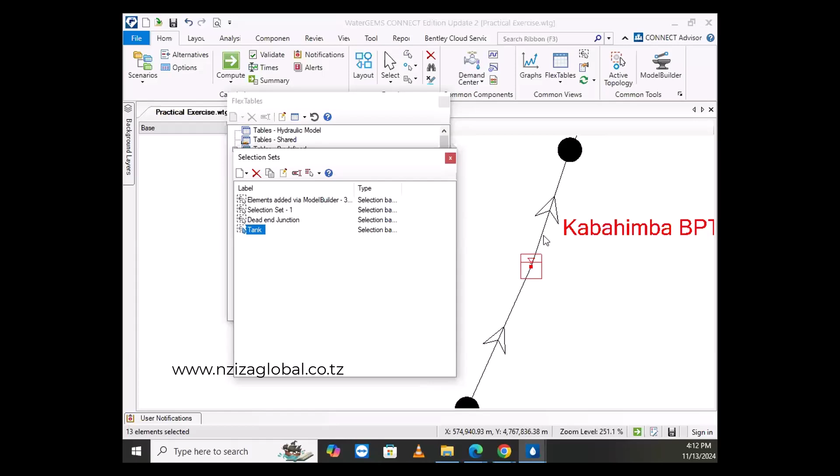So we have 4.5, and that's the one we are going to put here. While we have 4.5 there, here we have 37. That's where your negative pressure is coming from, because the water is going like you want and is creating some pressures.

So then we put also here a flow control valve. See, my network is reversed also. So I set this one to 4.5. Then I run again my network.

So please, before running, you see that at this level, the water was going this way - that was because the easy way for the water to go was down there where there is a big access. But by setting this flow control valve, let's see what will happen.

See that water is entering that tank. They only went, the others are coming down. And here also you may find the same scenario.

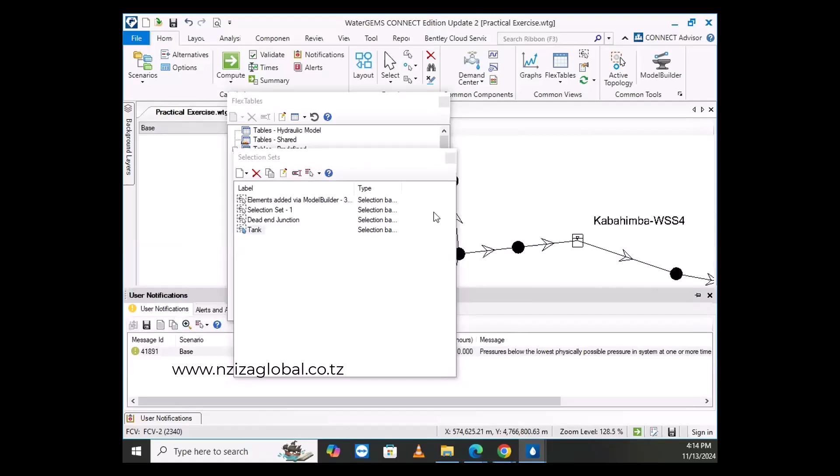Maybe here we need 0.8, but here they are passing 1.7. So then here also you put a flow control valve on that part, so all of those negative pressures will start being reduced. At the end, you get the network fully designed. Don't think it was easy like before, guys.

Hello. Yes, you were following when we were talking about flow control valve, I think. Yes, I was following. You were following, yes.